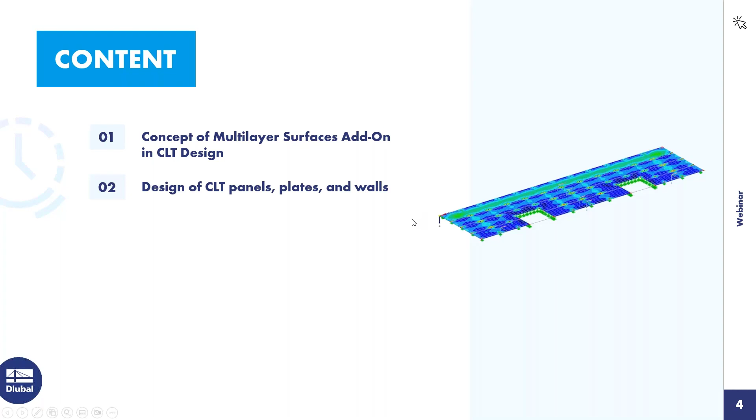The main topic is the design of CLT panels, plates, and walls. The third point is hints for modeling and results evaluation. Then I hand over the screen to Bastian and he can start.

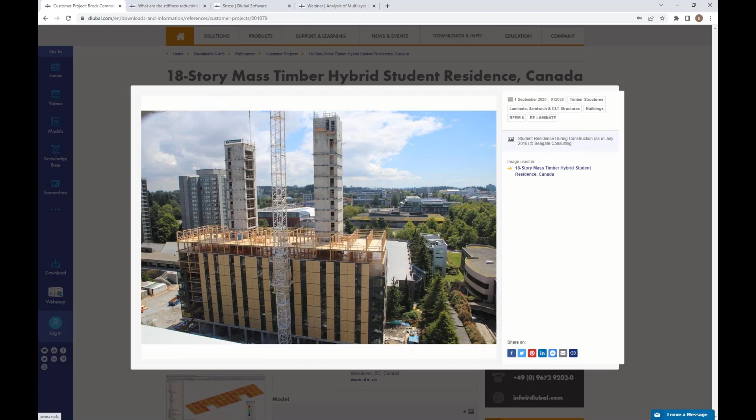Thank you. What I want to show you today is actually separated into two smaller models. The first one is based on a customer project, which we will just model from scratch and design. It's the Brock Commons building, so that's 18 stories and 53 meters high, standing in Vancouver, Canada. It's just because it's a perfect structure, and we will actually design one story of it.

Therefore, we directly go into our new program, RFEM 6, and will create a new position. I don't want to lose too many words about how you arrange models, and we are not doing a theoretical introduction into the design process, but a few words can be said about how the general model is going to be defined and how you can assign it.

First of all, we give it a name, that's Webinar CLT 2D Plate, for example. In the second register, we are actually activating the add-ons for what we want to design. So what do we need to do today? Of course, we want to define a CLT floor.

For this, for generating the stiffness, you would need the add-on multi-layer surfaces. It's written in the brackets there, e.g. laminate and CLT. So it's not only for timber, for CLT, it can also be used, for example, for glass and several other products like carbon fibers and so on. Wherever you have several layers of any kind of material lying one over the other and generate a stiffness from it, this is the add-on that you would need in our portfolio.

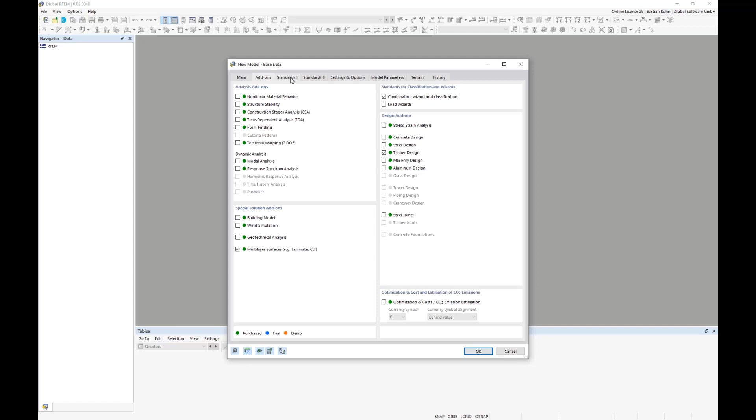As we want to design for timber, so for CLT, and we are in Germany here, I'm using the Eurocode with the timber annex. In case I would be designing in America, Canada, Switzerland, or elsewhere, I would have chosen the other standard. I can keep the global national annex, but of course there are for each country in Europe several national annexes you can choose.

In general, what you are doing with these annexes is assigning deformation coefficients, the KDEF. In this case, I'm designing in moisture class 1 and therefore use KDEF 0.6, which is already predefined. But in case I want to use another value, I can choose that there.

Timber design, it's the same as what counts for the load generation, and therefore we can skip that now from the explanation.

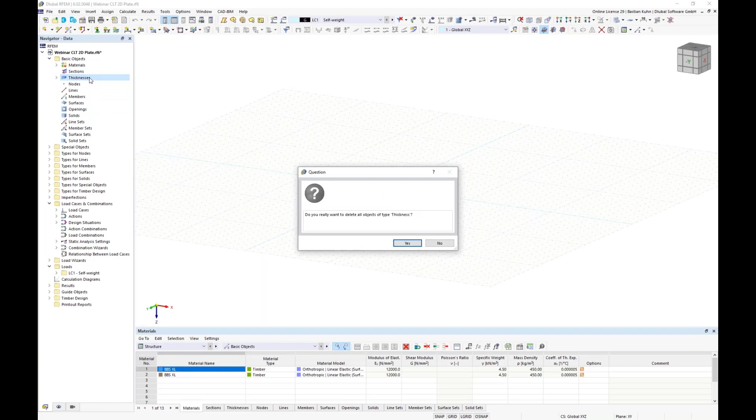Okay, then we are in the screen of RFEM 6 and will directly define the new thickness. Sorry, I wanted to start with a blank sheet, so I wanted to delete thickness and material because I want to show you directly what you have to do.

So if you go in here and want to define a surface, you first create a new thickness type here. Because I have activated the add-on multi-layer surface, you have a thickness type 'layers', which we will be using today.

So when you choose that, you see that thickness and so on can no longer be introduced here, but a second register is opened where you can define layers.

There you can also directly go to the material database and choose an orthotropic material model. If you go to the library, you can see that we already have a few producers there: Binderholz, Haslacher, KLH, Züblin with the Legno itself, Stora Enso, and so on.

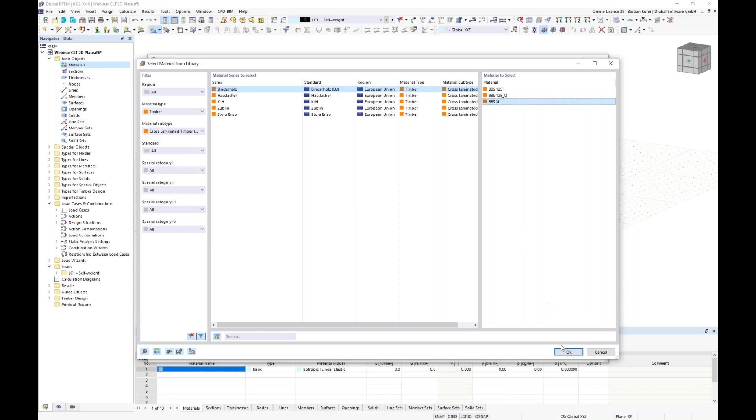I will choose Binderholz with the BBS XL because I want to show you exactly what this is doing. Now that I've chosen this material, it took directly from the database the correct strengths which the producer, Binderholz in this example, gave us - especially the verification or strengths for the shear stress verifications, which is something where you do not have any values from standard.

So if I had chosen an ordinary C24 material, I would not even have this strength here and would have to assign them. Okay, so now this is predefined and ongoing.

It also made a stiffness of 12,000 Newton per square millimeter in the X direction, and in the Y direction it is 0. I said already, we don't want to give you today a theoretical introduction into our design.

Therefore, during the modeling process, I will show you our homepage where you can take a look into the manual, and we offer also special trainings for that, which I will also want to show you.

But now, just what I say: in X direction, it's 12,000 Newton per square millimeter, and in Y direction, for one layer, we have a value of 0.

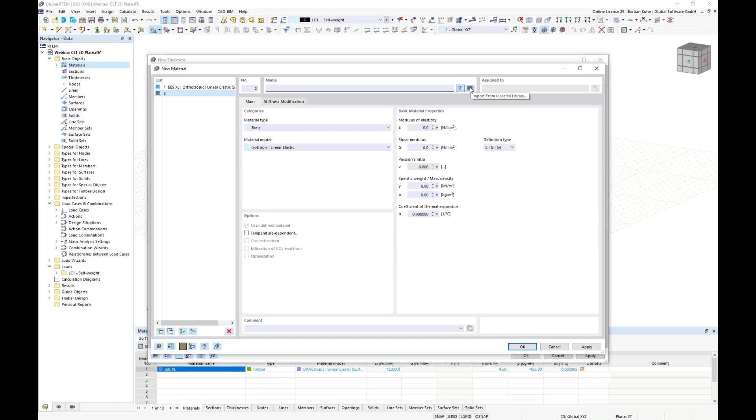For graphical reasons, I'm now choosing the same material once again. So go directly back to the database, choose this material here as well, and give it a red color, because I like the difference between red and blue.

So that's here. I'm using exactly the same material model. There's no difference in between this. So also the material values, they are the same. It's, as I said, just for graphical reasons.

Yes, you see now that it's red, and in the rendered material afterwards, it will also be red and blue. Just a personal point.

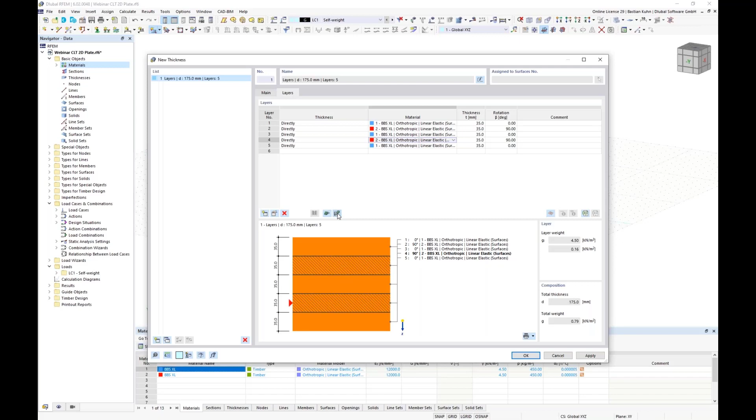You can also save this setup to a database. So of course, we could use it for the second model that we want to create today. Therefore, we name it now Webinar CLT, or whatever name you want. And then later on, we can load it from a template in here.

Ongoing, what I missed now is the stiffness reduction, because when we are calculating with the shear stiffness transfer of the load, we have to reduce the shear stiffness in some parts. So the torsional stiffness D33 and also the in-plane shear stiffness D88.

I will also show you a link later on where this is described in more detail. Here at the bottom of the third register that has now opened, I have options especially for CLT design. I could use glue at narrow sides. The reason for this is that most producers glue their CLT on the narrow sides, at least for the production process. They do not assign it for stiffness, because this is in the values I just showed you—the EY is still 0 there—but they are using a little bit higher shear strength. But stiffness, because of cracks in the boards, they are not increasing it or regarding it. So in the first model I will glue it at the narrow sides, and in the second model I will show you the difference, what happens when you switch it on or off. For now, we're using it glued.

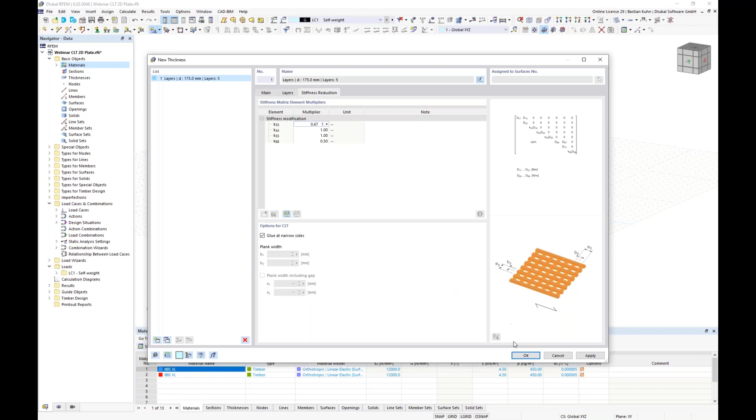Okay, say okay, one more time okay, and now we are in the screen. Use the origin of 0,0, and then take a width of 55 meters, and the height of each plate should be 3.5 meters.

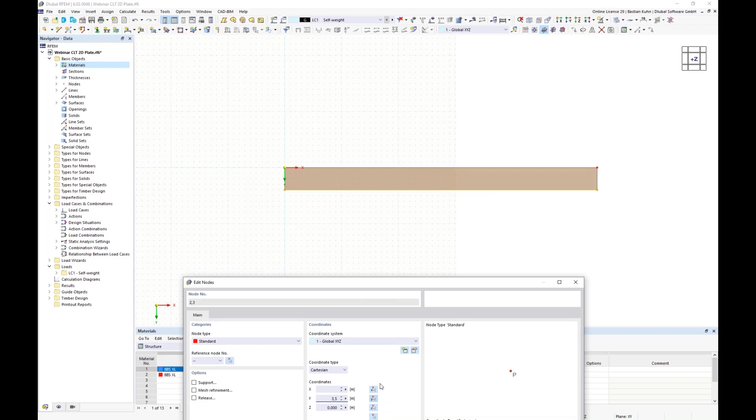Of course, I know it's not possible to produce a 55 meter long board, but there are options to calculate such things also stiff for the rotation. I want to have several boards with a width of 3.5 meters in the Y direction, and that's where the higher force can or should be regarded.

I'm using the dynamical size of the grid and will now copy the system 3 times into the Y direction with a value of 3.5 meters.

So then it's here, and I want to show you now why I used the rendering. Therefore we switch here to the view screen and say surface. So see it—no, now you cannot see it. Sorry, I have to go to model, solid model, surface, filled including thickness.

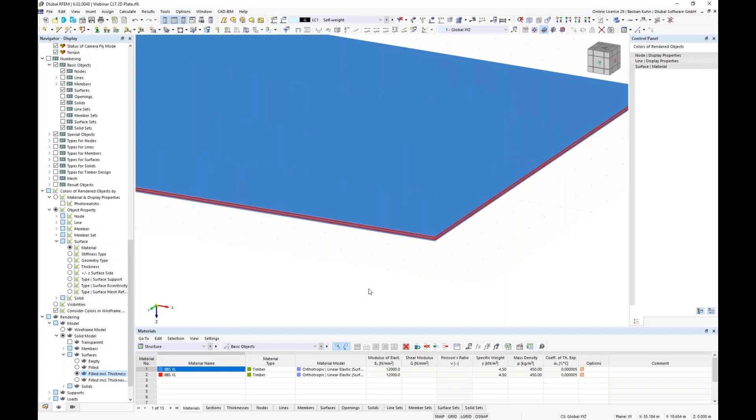Now you see that's the only reason why I did that, because you can now see each layer in here, and it also becomes much better visible how the layers are oriented.

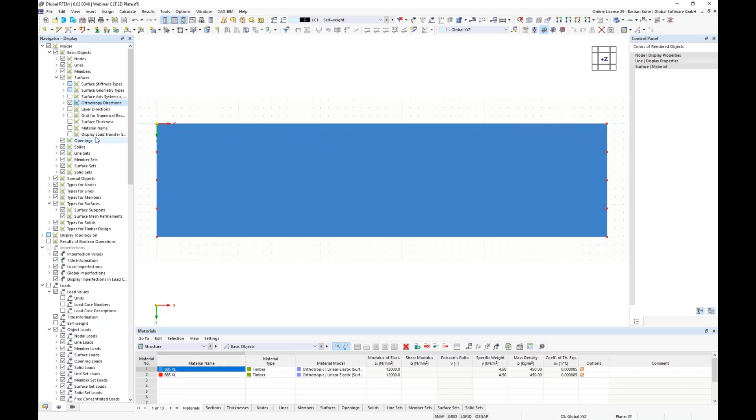We have implemented here in the surfaces a so-called orthotropy direction, because the material model I showed you and explained is an orthotropic material. But if you switch that on, you see nothing happens. Why is it like this? Because now the layers are oriented in 0 and 90 degrees.

If you want to see how they are oriented, you first have to switch off the rendering, and then you can see how they are oriented. If you switch the indices on, you see that layers 1, 3, and 5 are oriented into the X direction, and layers 2 and 4 are oriented in the Y direction. So my main stiffness is in the global X direction. That is what is important here.

Okay, so that's the model. I can right now switch that off and divide these 2 lines by 3 nodes, because these are going to be my stiffening cores in the center. They are made from concrete, and I'm just attaching to this.

That's how it was assembled in the building in 2017. They have a width of 6 meters, and the second core is at an origin of, let me take a look, 37 meters. I'm not using the exact values from the building, but just to have it close to the structure that we have.

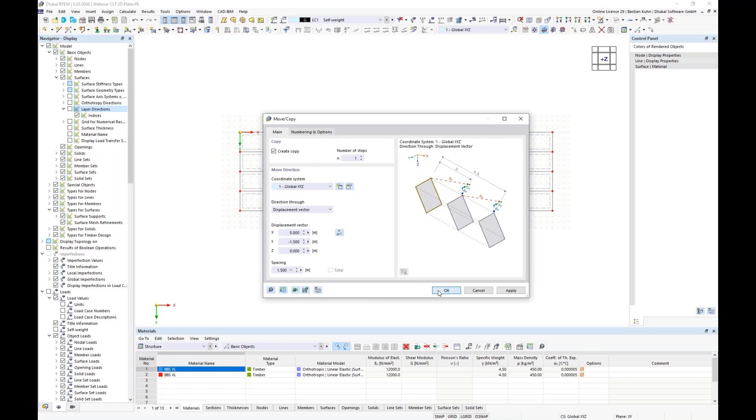So these 3 nodes I will also just copy once, minus 1.5 meters. Say okay, and then I have it there, and I will draw a few lines in here and there. This one I will copy via drag and drop onto the right side. I will connect the lines in here, and then it's okay.

A very nice function—not a feature, a function—is if you right click in here, you can divide the surfaces by integrating lines. And now you can just delete the surfaces which we do not need.

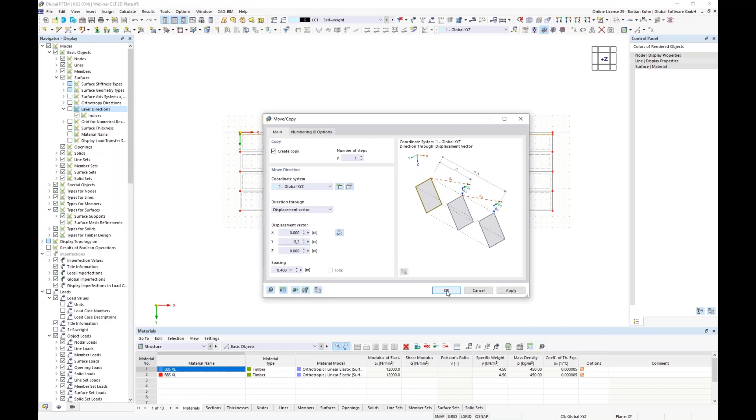The facade is running on the outside of the structure, and the supports are laying on the inside. Therefore we are copying the outer line now about a value of 0.4 meters in the Y direction, and this one also on 13.2 meters as well, also with one copy.

I will take the inner lines, and before I do that, I have to look for the orientation of these lines, which also works via the display navigator lines, line orientation. Now you see that this line is not in the same orientation, so I will use reverse line orientation here.

Now that I'm in this dialog, I can also check if my line axis system is similar. Since I changed it, this is important later on in order to define the slip between surface number 1, 2, and so on. I will explain that when I get to it.

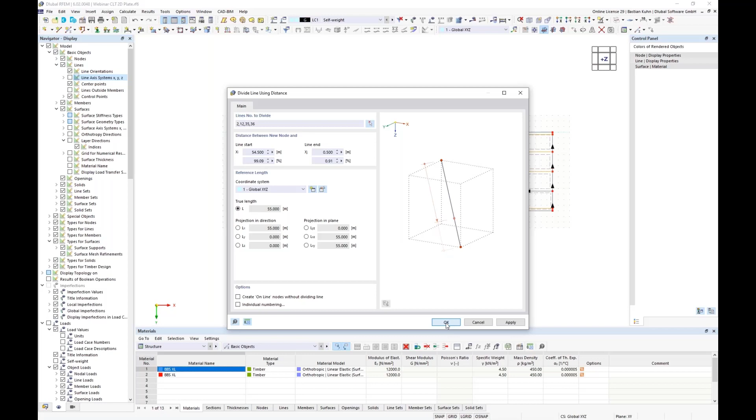But first, for the supports, we want to divide the lines here. Divide line, distance from the end is 50 centimeters. Still forgot one, sorry for that. Divide line with a distance at the end of 0.5. Okay, it's not happening again because I have to do it here as well. Divide distance, and then at the start also 50 centimeters.

Okay, now this is how the supports will be running, and of course that's not enough supports. We need more columns in the structure.

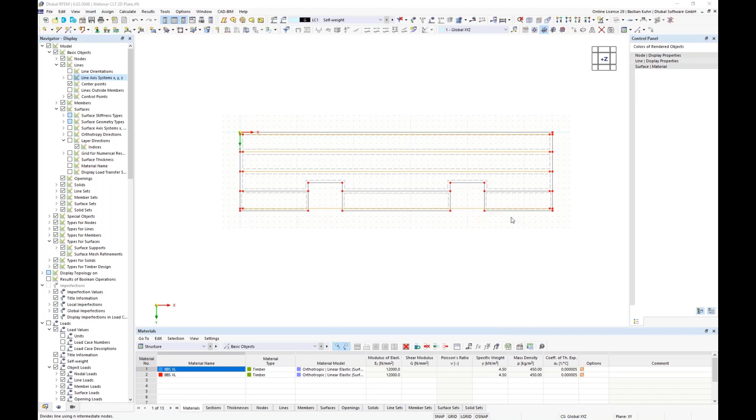We also have to divide the line by intermediate nodes, and a very nice function in RFEM 6, which has been improved compared to RFEM 5, is that you can now create a line without dividing it. You could do that in RFEM 5 as well, that's not completely true what I'm saying, but there are more options for it right now.

So I'm copying it 11 times, I think. Yep, 11 times without dividing it. That's all, sorry. Okay.

Now the structure is nearly there. I have to just interconnect that. Actually, that's not really necessary, I could also have left it like this.

And for the inner line here, of course, you also want to have the nodes copied there. The shift function deselects what you do not want to copy. Now I'm doing one copy with a value of minus 3.1 meters, and now they are there.

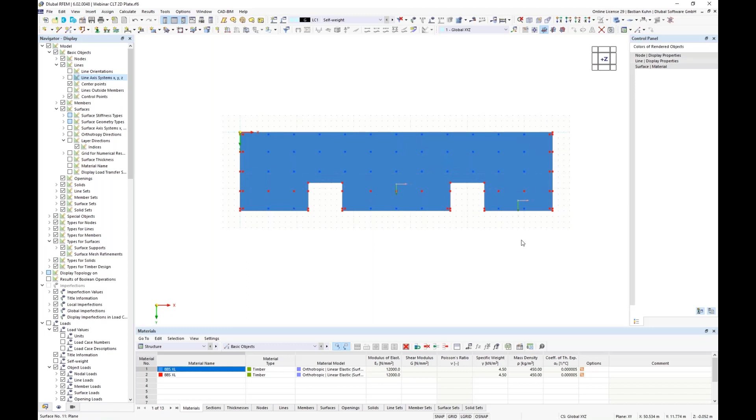Okay, I introduced it already several times, and the question is, how can I now define a slip in between this structure here? That would be done with a line hinge.

A line hinge is also very much improved in RFEM 6. If you remember RFEM 5, you had to do a lot of line hinges on such a structure, and now it's possible to do it for only one object. But still, you would have to define a slip here in the UX and UY direction.

And therefore, for the first time in this presentation, I want to jump out a little bit and show you a very simple calculation, Excel based. I just want you to know how I get this value and not grab it from heaven or somewhere.

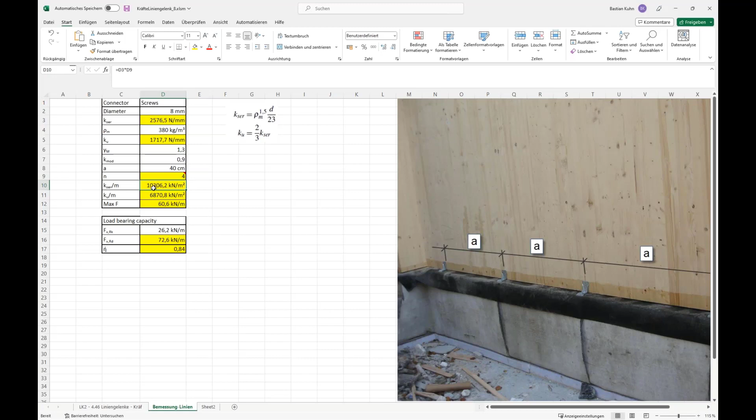Sorry for this little excursion, but I wanted, as I said, not to just present it as if it were heaven sent.

And if you have this value for the slip modulus, you can go inside our global parameters and name it, in this case, K. In the unit groups, you already have a lot of values that you could use, and we want line spring constant, which gives you this value here. Okay, insert, and now it's there.

That is not really a big step, because if you only have this, what does it bring you? Because now you design the structure and find out, okay, 3 connectors isn't enough, I need 4, I need it more stiff. Then you always have to jump back in here and define it, and also for your documentation, the printout report, you have like nothing.

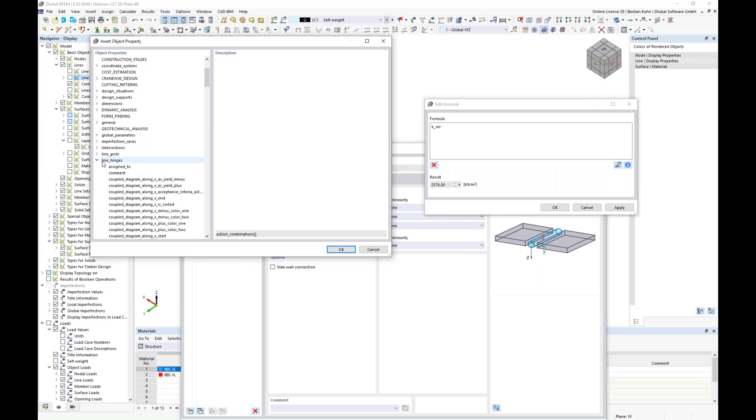So how can you improve that? If you go to this info box in here, you see there's the option to insert object properties. There are now also very, very many options that you can do, but we just want the simplest one of it, line hinges and comment. Say okay, and you see right now it's a simple JavaScript function that I'm using in here.

But it has an intelligence behind, because it already tells me what you're doing here is an error, something wrong. What is wrong? I need to tell the software what object I want to assign the comment to. So in this case, that's object 1, I just have to type it here. You see it in the list on the left side. And I forgot the addition in here. So now you see, well, the value is still 0, but I have something in here.

In order for my documentation, I'm using this little slash in here. That's just, yeah, something you need to Google and will find out directly.

So if you say, okay, nothing changed, that's a little bit annoying. Why is it not sending that value that I want? Because you have to define it here in the comment. And if you see, say 3 connectors, or whatever, you can also say 3 screws or whatever it is.

First of all, this comment is taken to the printout report, I will show you after we did the design. And now if you find out during the process, okay, 3 is not enough, I need to do 4, or it has just to be stiffer, you can just define it here, and it's changed in real time.

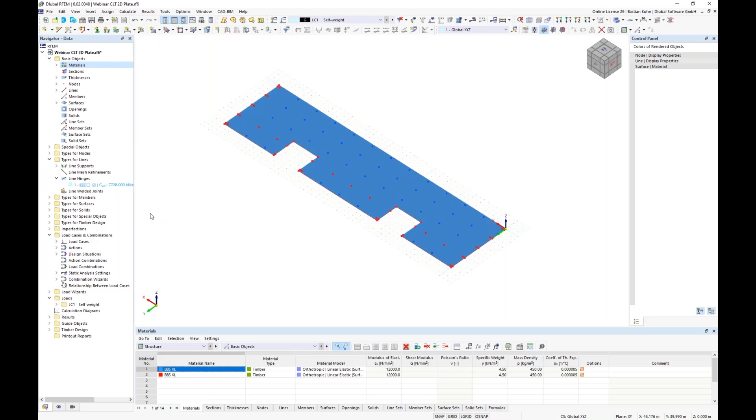If you jump into types for lines, line hinge, it gives you the opportunity to show you the advantage of it, because in RFEM 5, you would now have to open the dialog once again and also define the line hinge once again. But as this is an object now here, I do not have to do that.

And can now do it correctly and choose the surface and assign it to this line, this line, this line. So wherever I'm assigning it, I'm defining a slip. So in between this plate and this plate is defined a slip, and this plate and this plate. And now is missing a slip between this plate and this plate.

And yeah, once again, back in RFEM 5, you would have to define the whole stuff once again. But in here, I just can click there, and it's absolutely no deal. So that's, to me, a big, big advantage of the new workflow.

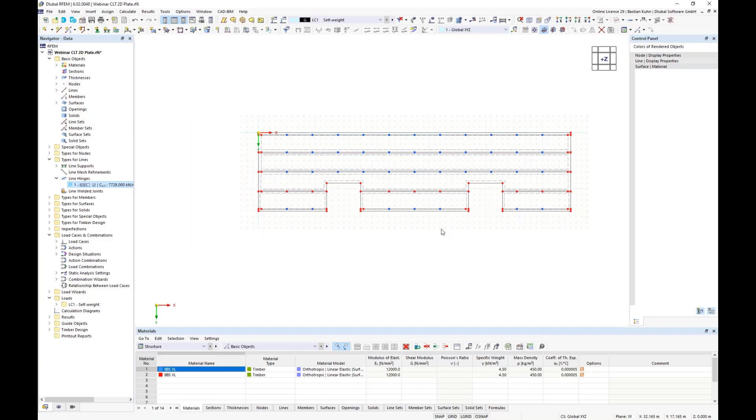Okay, it's a little bit small. Maybe I will just increase the size a little bit just to see it in here, and go actually in Z direction again. That's now defined, and I can define the supports that are presenting the columns underneath. They are very simple, they are just using force in UZ direction and nothing else. Say okay, and assign it.

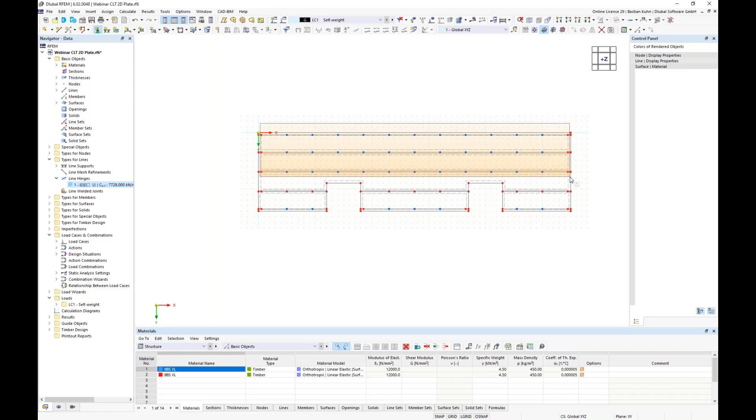In here and in there and there and there. That's also, to me at least, a little bit small, and we can also maybe just a little bit increase it. Okay, what else do we need?

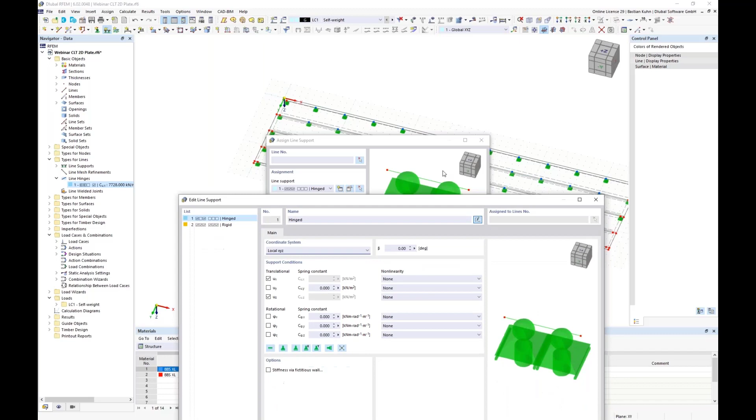In this case, when there's a horizontal force, it will just move away, and we need to define the line supports from the core, and that would work via line supports, define or edit the existing ones. We use actually the same intelligence here, but for local systems, and because we want the force just to be acted in longitudinal direction of the line, I will just release UX, or just give the slip to UX UI.

I will complete the release. That's how I want to do it. And then I'm using the same as before, using Kaiser. Do not make the mistake from before.

Now if you go in here, it's not line hinge what we want to do now, but line supports. They're also just the simplest function comment. You see here, you can do a whole bunch of stuff with this, like diagrams with forces coming from other directions than UX and so on. That's all included in here.

But yeah, once again, we use the simplest one. So with line support, one point, same function like before, 0.1 and this, no error, and then we just type it here. What did we write? I forgot it, three screws I think. Now we have it here. Yeah, works the same way, trust me, it is like this. All right, three, this, okay.

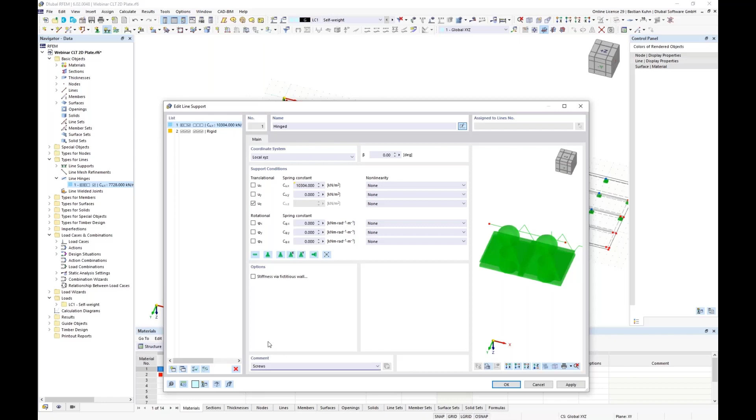But we need to assign it to the lines, that I should not forget. So where do we want it? There, and there. Choop. And of course there, and there.

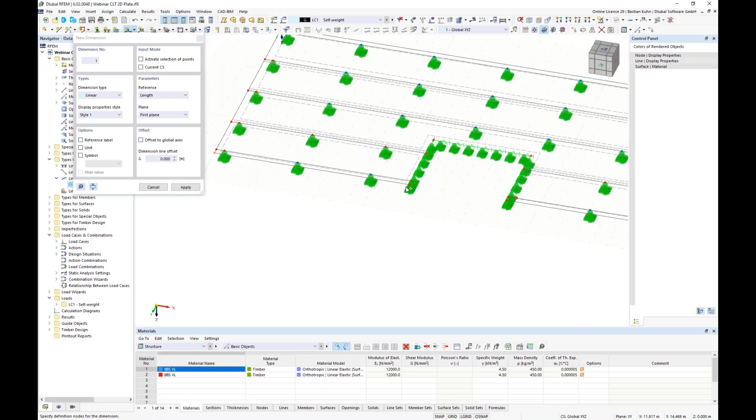So the model is now already there. Maybe we want to have some dimensions for it as well, just to make it a little bit nicer. And maybe we are actually directly starting the printout report, because there's something quite nice in the new RFEM 6 that I want to show you once we have the dimensioning ready. So okay, sorry, maybe you would do it differently when making the design, but for this I think it is now all right.

And we print this graphic to the printout report, because in RFEM 6 it is possible to have the printout report opened while working on the model. And we will do that. We will maybe use it window filling, or maybe we take maybe 40% of the height.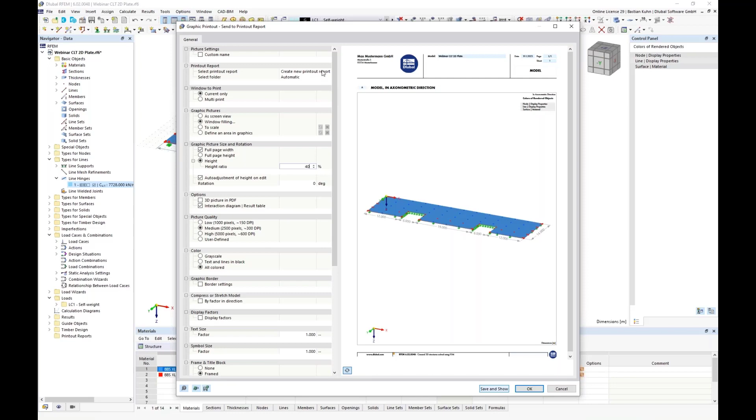Save and show. I did not choose a printout report. I don't know, actually I should have selected the printout report in here. Here. So, and it works the same way like the material database before. You have here templates you can choose from. And I actually have created one for today's webinar, especially where I selected and deselected a whole bunch of stuff.

I think we will now assign it and then go back to the design process. All right, it's generating it. Gives me time to drink coffee, a small one. Okay, now it's there.

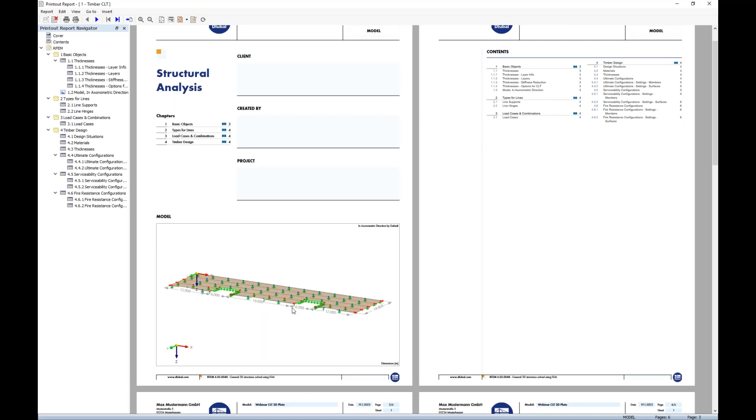Actually, I could have opened it, but we're not doing a webinar about the printout report today. Of course I want to show you what kind of points you can implement in there for CLT or for timber design in general. Okay, so here's now the model, and that's it so far.

And we go back to the design process and introduce the load. Deactivate all dimensions, because I don't want to see them any longer.

And introduce the load. So first of all, we're doing a horizontal force just to have a deformation in Y direction of 1 kilonewton per meter. If you have looked for the building, it is standing in one of the highest earthquake areas around the world, so there's probably more force than 1 kilonewton per meter, also from wind, there's probably more force. But yeah, maybe we are on the ground floor here and just have some small force.

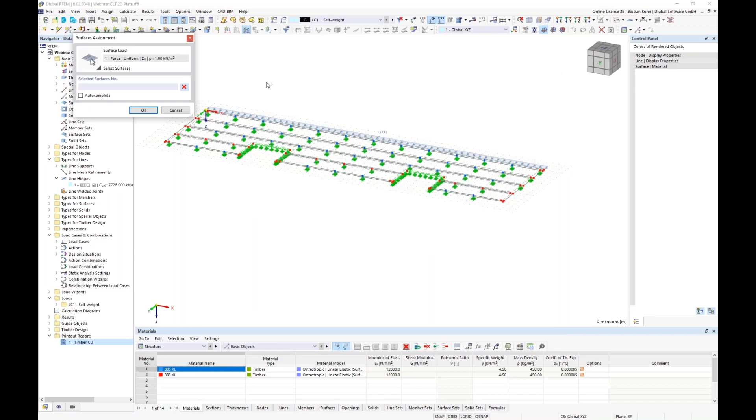We also take a small value in load case 1 from self-weight and say okay, we have that here. And now we define for each plate a live load. So this will be 5 times.

Say okay, and now also one of the advantages, if you compare it with RFEM 5 - and I worked long years with RFEM 5, so I'm still comparing it, but if you are new you do not have to compare it - in RFEM 5 you would have to define the surface on load case 2, say okay, leave the dialog, then choose the second, or in this case the third load case, assign it there, and so on. As you see here, this is also no longer necessary.

All right. And last but not least, this one.

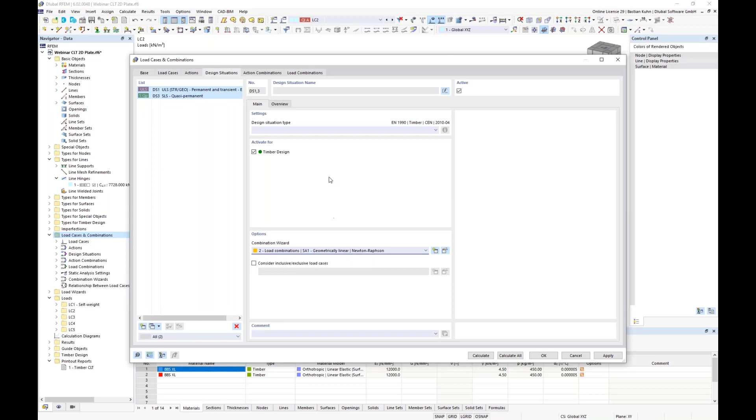Okay, so we can now also control if we did that all correctly. It's all correct. Let's go into the load cases and combinations. I'm choosing timber here as a standard group, and for the design situation, I would just use quasi-permanent. The others aren't of interest, and I'm calculating according to first order theory, automatically creating my combinations for that.

Now they are here, okay. I could have started with the design in the add-on timber design, since I've activated that in the basic data, but I have to show you the objects you should take care of first. If you compare that with RFEM 5, there you have the design add-ons Laminate and Timber Pro, and everything you defined in these add-ons is now moved in RFEM 6 into the objects.

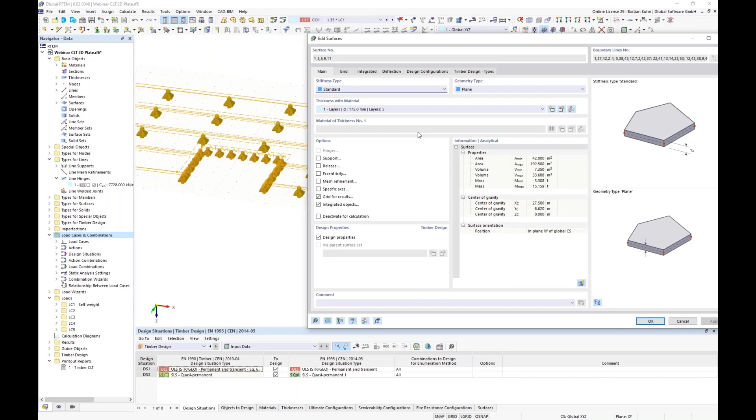In this case, we are designing surfaces, so you define it here in the surface. First of all, if you look for the deflection, you can choose deformed or undeformed system, but that's not what I'm up to. I want to show you that a plate is always a little bit problematic when it comes to a non-clear deformation, where you should also consider a reference length.

The distance between this support here on my node and this point is actually 4.5 meters, if you remember what I did by copying them. But how do you want to regard it with this other side? Therefore I choose 5 meters, because I'm taking the difference between this point here, which you can't see now, and the other point there. So, to me, that is now on the safe side.

And if deformation gives me problems, I would anyway have to do a more detailed deflection analysis. Okay, I hope that explains it a little bit.

Ultimate limit state configurations: we have a combination for ultimate limit state configuration, and therefore, of course, we also have to look at the objects. The first two registers are for members, and the third one is for surfaces.

Maybe most interesting for the designer is that now for CLT, it's also possible to consider a system strength factor. So that would be possible in here, and then you could increase it to 1.1, for example. The other options are not important for surfaces, so I'm not explaining them.

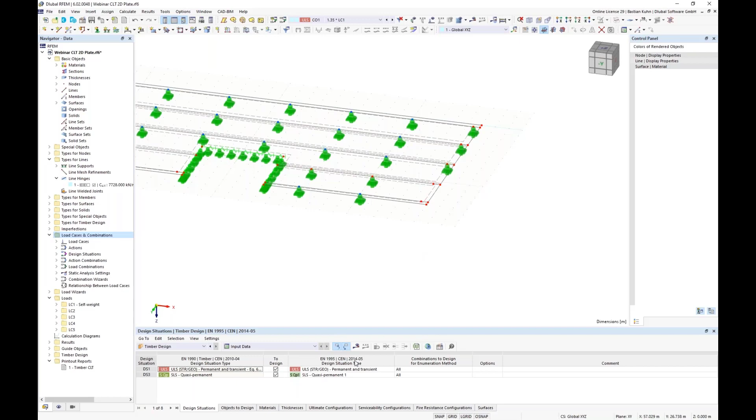Okay, so that's now done. Enough explanation. As a first step, I can also just calculate the ultimate limit state, because the serviceability state I could design once I'm sure everything else is working correctly.

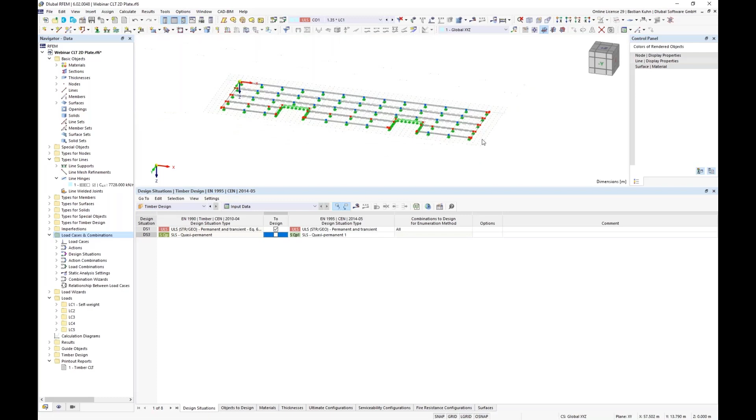Actually, let me see what I missed here - there's a support missing there, and also there. Maybe I should do some checking before we start, but the rest looks great.

I will start the design process and give you small explanations about how the stiffness is generated and what is actually done in there. That's what I wanted to show you right away.

Okay, that's opening now on the other screen. Ta-ta! Hold on. Oh, that's confusing me. I hope you see it now. Can you see it now?

Maybe my colleagues can give me... Andreas, can you see the presentation now? Yes, perfect, okay.

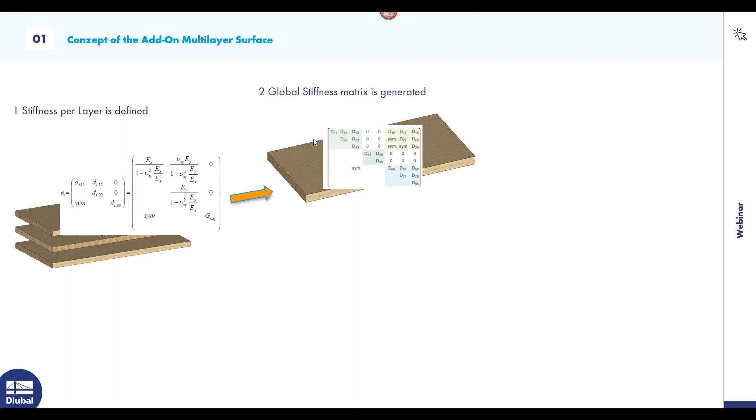Just a small theoretical explanation - if you remember how we introduced the layers: we defined a stiffness of EX and EY, a Poisson's ratio, and a shear modulus, and that is now defined in every layer. From each layer, we calculate a global stiffness matrix, which is exported into RFEM. In RFEM, we calculate deformations, stresses, and inner forces on one plate, not on the whole layers, but on one plate. These inner forces are then transferred into every layer. That's the theory behind it.

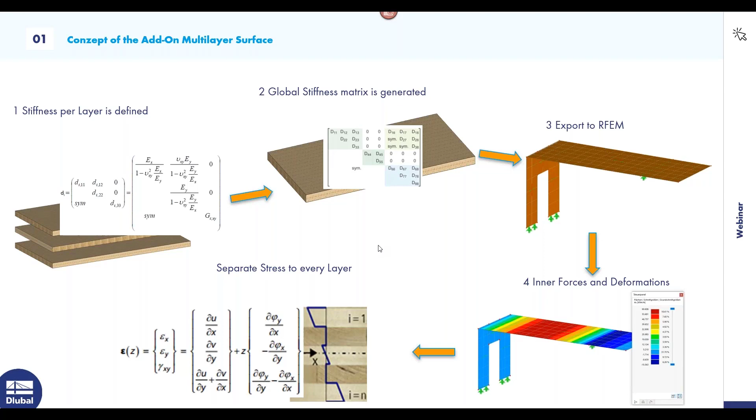So let's see if we can get RFEM6 back, or maybe the homepage. I don't know, right now my screen is a little black. We can take a look. Transfer. Okay, there you go. I did the webinar in German language on Tuesday, there are problems with my screen. I think that's based on the software. Sorry, go to webinar. I don't know, okay. We can take a look at the results in RFEM6. Hold on. How did we name it? I think it was this one.

Okay, so you see we have now an overloading, which is not the desired behavior because we want to be green and we want to be smaller than 1.

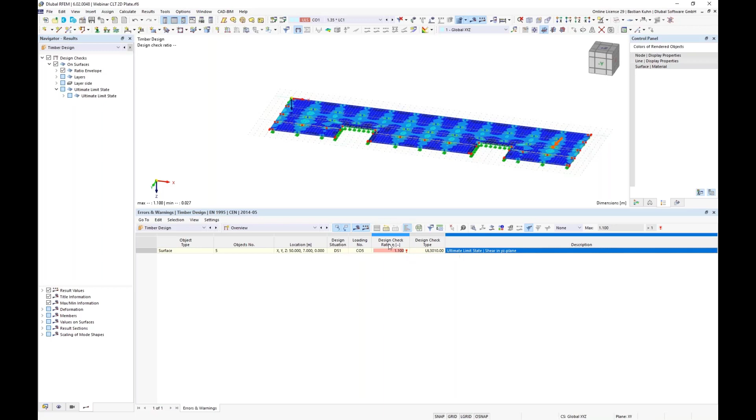But if you look into the details, you can see the overloading is just in a very small spot here. I can switch off the nodal supports, they're not necessary to me here anymore. If you realize that in reality there's not a needle standing underneath this point, but a column with a diameter of, let's say, 40 centimeters, it's obvious you should not take the force in this exact spot, but somewhere outside. I'll show you how to do that.

In the literature, you will find this described as a so-called punch-through verification. But before we do that, let's take a look at the verification itself.

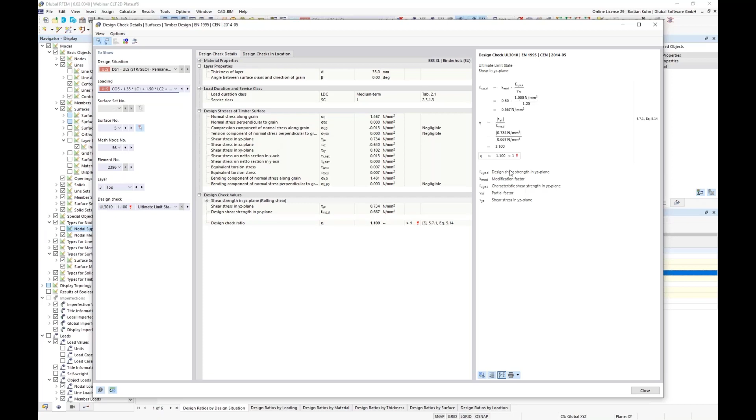Via double click, we go into the details. You see now that in RFEM6 we have quite nice equations shown here, filled with values - the shear strength is shown here. You have the option to look at the ratio over the section itself, and here are the several layers we've defined. You can switch to stress and look into it - sigma x, the bending stress - you see that where you have high stiffness and high loading, you have a higher stress.

And of course we also want to take a look at the shear stress, which is usually in the center of your section. That's the same for beams as it counts for plates as well.

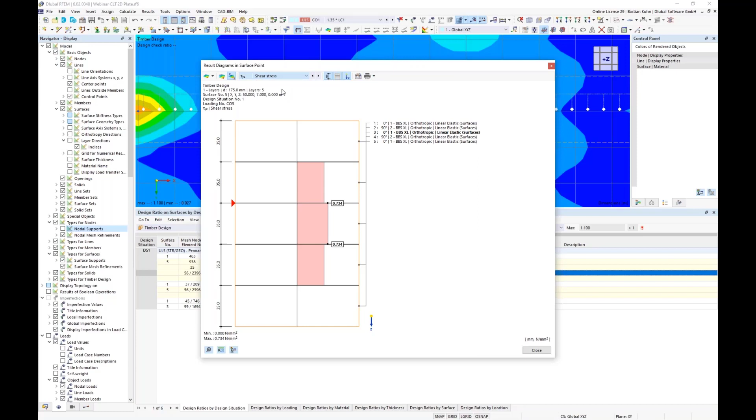You could also print such things - maybe not this one, but maybe this one - into the printout report. It's opened on the back, so we can just take it like this, maybe a smaller height. Actually that's okay, so we say okay, and then it's already in the printout report, and I don't have to look at that now - we'll do that later. Say close, or I could have left it open, it doesn't really matter.

What else is new and possible, and much nicer than it was in RFEM5? If you go to the result navigator here, you can see that first of all you now have a ratio envelope of all stresses in here. You have them here and can print them to the protocol directly, or use them for your analysis as well.

You can separate between several stresses and also between, well we just have one layer here, but several layer sides - for example top, middle, and bottom. Here I can choose the layer. So for shear you would probably use one of the inner ones, and for bending you would probably use the outer ones. That's the first nice function.

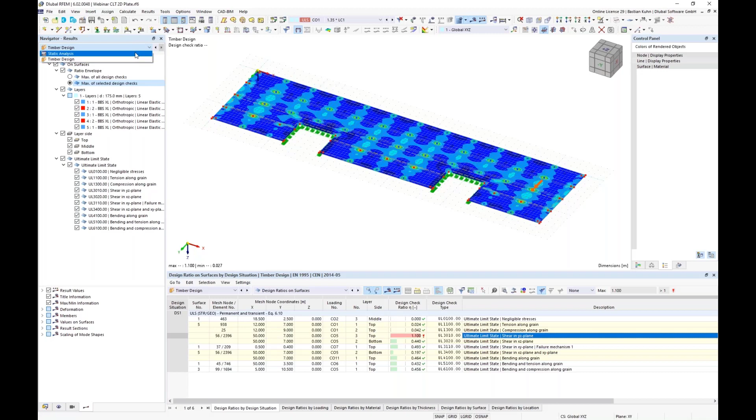If we jump back to the static analysis itself, for the connection design, when you go to the static analysis you can see the global deformation and compare it just to get a feeling of what's going on here. You could also look at your stresses and strains for each layer. That's quite interesting for some cases, I think.

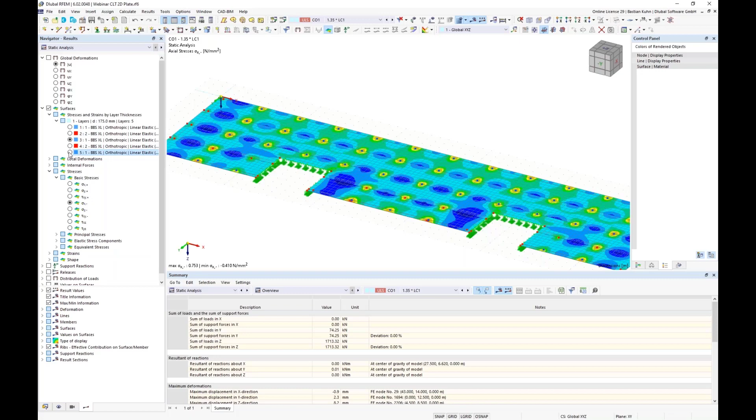If you compare sigma x on the negative side of the surface, you see a maximum value of 3.8 at the top. If you go to the middle, the value is quite low. And if you go to the bottom of the section and choose sigma x on the positive side, it gives you the same value as you had on the top side. So that's also something you could use for your analysis.

We want to look at static analysis for the connection design, so we have options here. The simpler verification of the connection is in the line support, because there we have just a slip defined in the x direction. So this is the force you need to connect with your connectors in the x direction, or the longitudinal direction of your line.

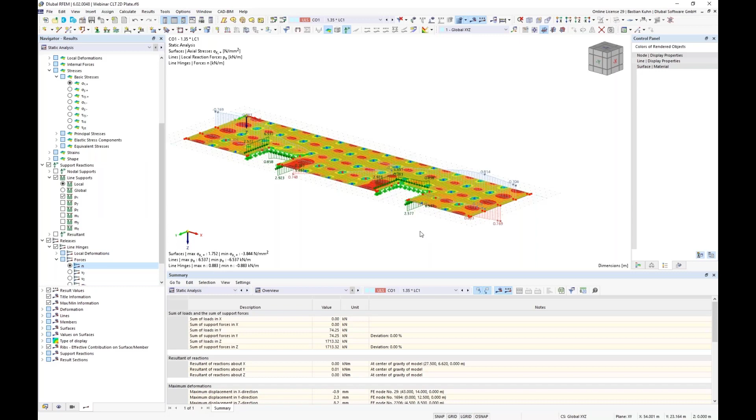For the line hinge, you can also take a look at the force here, which is the force you have to assign between this panel and this panel. Let's take a look where the maximum value is - well, it doesn't matter, it's here. It's quite a smooth value, and you don't have any singularity effect in the connection itself. But nevertheless, from time to time you will face this problem, so in the result diagram, maybe we'll switch to one of the bigger ratios here.

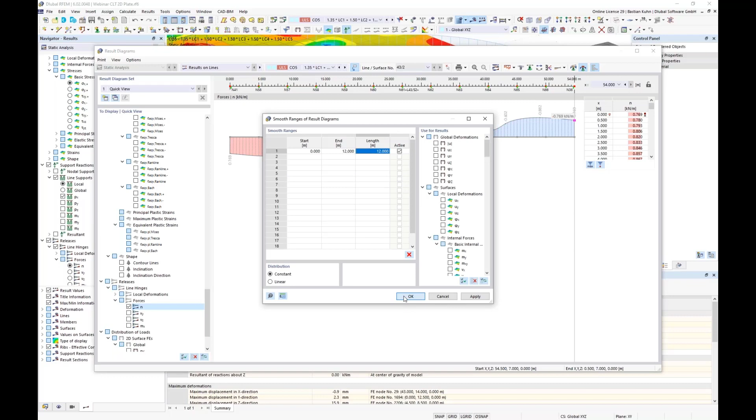In the result diagram, you have the option to smooth these values as well. So you can say force, normal force, and if you look at the values here, say okay, 10 meter, 12 meter - that's where I'm averaging, or where I'd be able to average my results. If you set start 0 and 12 meter like this, you see the force that has to be attached by connectors is 9.464 kilonewton, and per meter you need a force of 0.789.

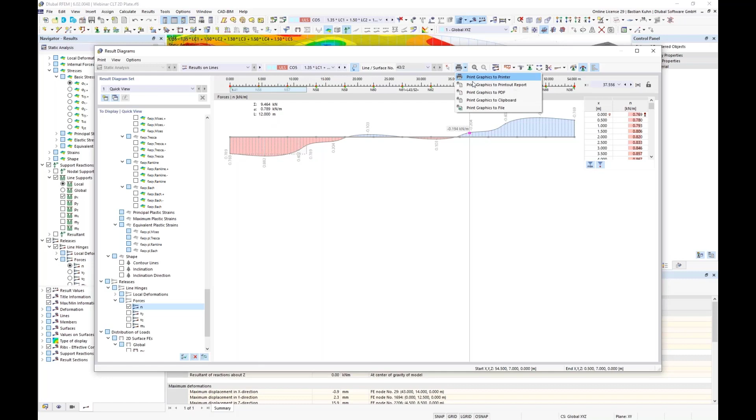So this is probably something we want to put into the printout report. We'll say maybe we won't use the full height, but something like this should be in there, and leave the dialog. This result diagram, I also wouldn't need to close - if you work with two screens, sadly in our presentation tool we don't have the option to show two screens at the same time, but this doesn't need to be closed either.

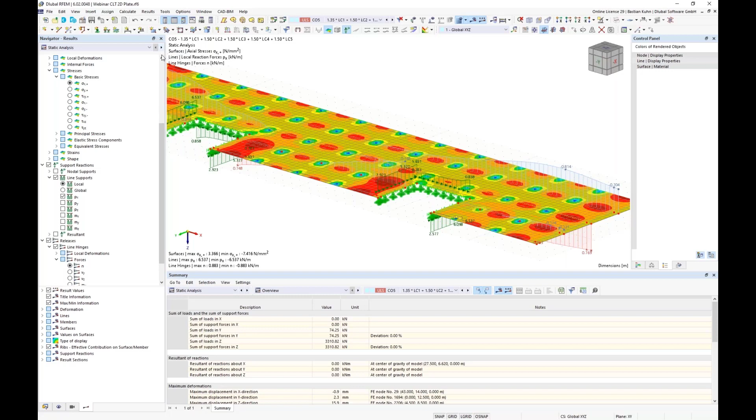Back to the design of the timber. When you look for that, we still have overloading here. How can you get rid of that? It's actually similar to what I showed you with the smoothing of the result diagrams - it's just called differently. It's called insert special object, surface results adjustment. This is just for smoothing your result.

So now if we say we have a column with a width or diameter of 40 centimeters, it's definitely possible to use a dimension of 60 centimeters. I'll show you the reason right away.

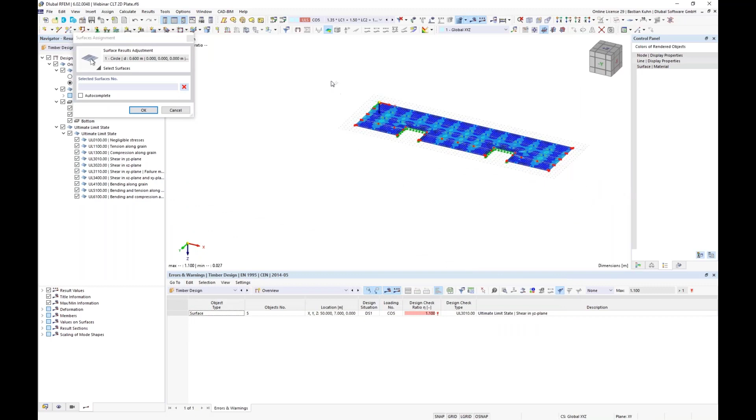I'm choosing all surfaces here, and I'll define it on the first support here - not the origin. You see I haven't shown the supports now because I've switched them off, but trust me, they are there. So this and this, I'm just using grab and... what's it called... grab and drag. Oh, I forgot it, sorry.

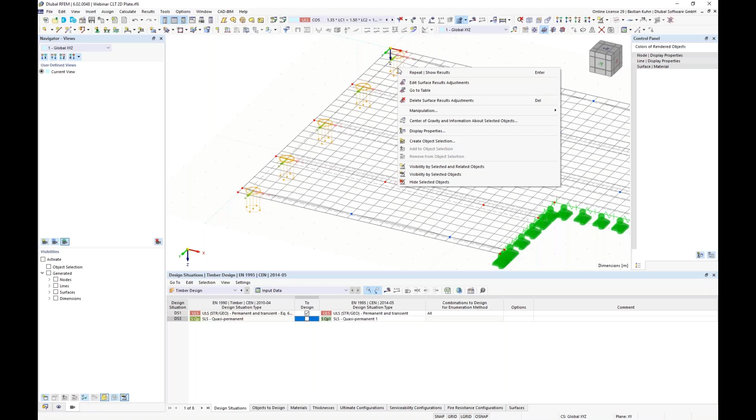So then I'll copy these areas here. Let me take a look how many times I need to do that. So, 12 times we need to copy it, because we have 12 supports in the X direction, with a value not in Y but in X direction of 4.5 meters - that's the span we have here.

So alright, go to that again. You see there's the axis system displayed for this - we don't need this, that's nonsense for our endeavors here. It also doesn't make it look that good, so we'll switch the axis system off.

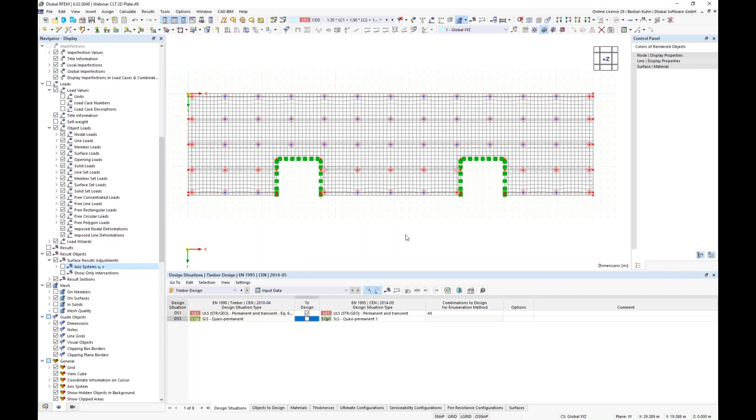And now we'll calculate it again. As I'm sure the design process is finished now, I'm also selecting the SLS design to be done, and go back to our homepage in order to give you the promised more theoretic explanations.

So one thing that I missed when I did show you the definition of the layer and the stiffness reduction was an explanation how the factors for K33 and K88 are calculated. My colleague Gerhard, who's now answering all your questions, has a very nice Excel file which gives you the option to calculate these values. Of course, when we have a database for the producers, we will also use the factors that the producers are offering us, so you do not have to calculate that for all the setups in there.

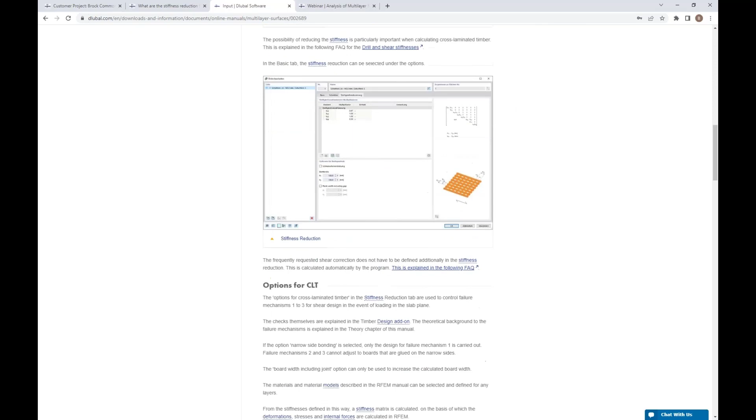The stress, actually, I wanted to show you later on, that's the online manual. It's not ready yet, I'm working on it, so there are still a few points missing. A lot of customers on Tuesday's webinar asked if it's possible to display the stiffness matrix for the global plate. Right now it's not possible, but you could download on our homepage or in the online manual a plugin tool, and if you use that, you can still see the stiffness in this example. So D11, that's the bending stiffness for this example that we have here in the manual.

I also said that we cannot give you a complete detailed theoretical introduction into the design of CLT. If you want that, we are offering online training. You will find it here also on our homepage, online training, and if you go to program version, training type Eurocode 5, that's actually the timber one. This is in March for English, the 16th of March.

If you like the building that I showed you here, this Brock Commons building, I did a webinar in September last year where I also showed the whole design process for the complete building, with all stories inside. That's it. So now let me take a look if there were questions asked very often.

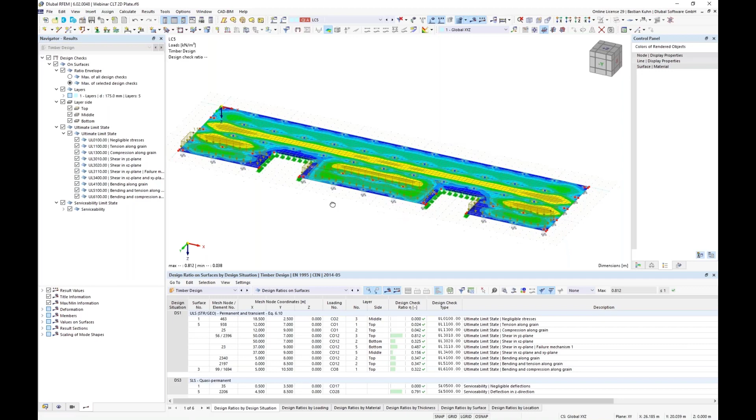In the theoretic world, you would have to define a live load in the first field from this point to this point to this point, and then this one should be empty, then this one should be loaded, and then this one should be empty, or this one should be loaded, and you need to do it in X direction and in Y direction. But for the sake of simplification of today's webinar, I just use this - I only know the German word - it's a Schachbrett loading introduction, you can Google that.

Therefore, I'm just using it in Y direction, not in X direction. Because if I would do that also in X direction, I'd have 10 or 20 load cases, and the calculation time will just increase.

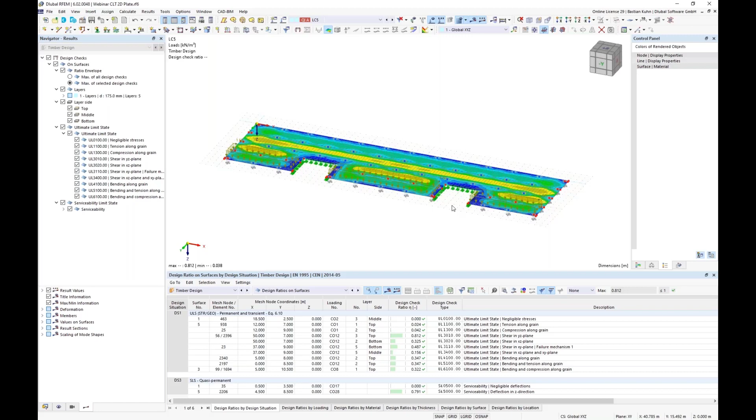You can compare it with a continuous beam. If you have 2 fields, you also have to introduce the live load on the left side and on the right side, because for the middle support, the highest force in the middle support will be with live load left side plus live load right side, but the highest field moment is with the force on the left side, if it is the longer span, for example. Okay, so hope that's clear.

And now we can take a look at the results and then just create a printout report and we are fine. Results good now, so the overloading of 1.1 is now changed into a loading of 0.8. Of course, you should make a finer mesh in here. So if you look in here, you see that the span is just smoothing it about this area. So in general, that's how it can be done, or how to regard the punching in here and how to avoid this overloading.

I've already shown you these verifications, so I won't spend too many words on that. Maybe we just go via double click into this verification of the serviceability and print out the report.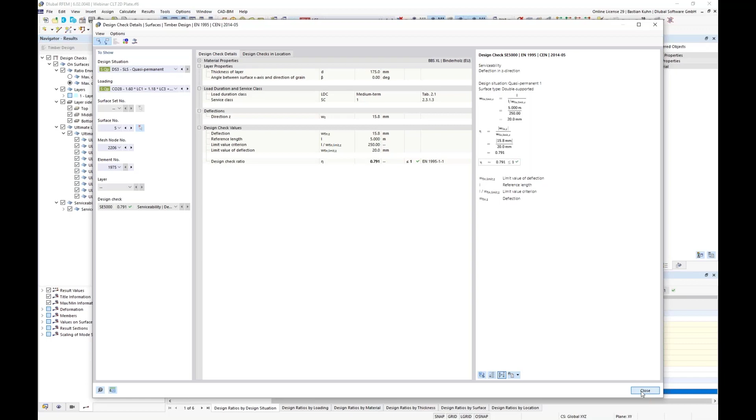You see, it's the same equations as in the formulas before. And now we go into the multi-editing of printing.

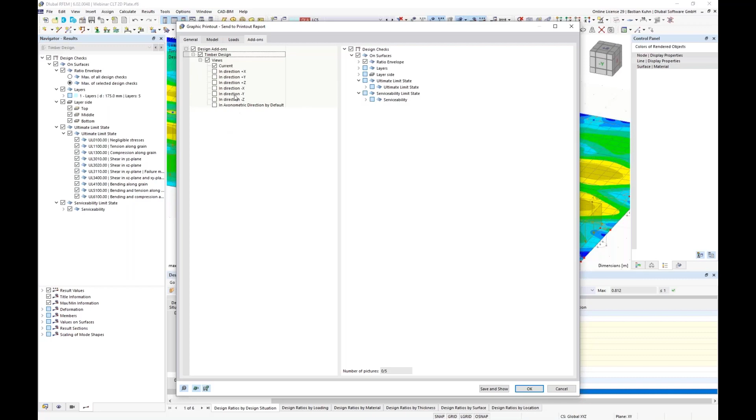Maybe, actually, I don't know - it's probably a lot of results. Okay, we can try to put it in there, and we want that window filling.

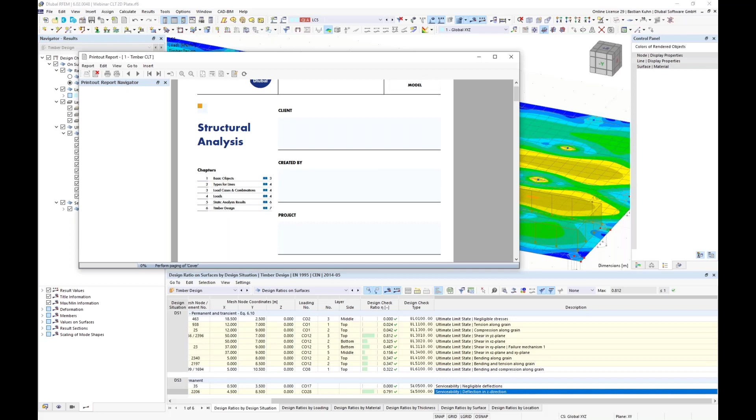And now we can open the protocol. I must find it, it's somewhere on the other screen. There it is, I think. Hold on. Yeah, there it is. Okay, now it's loading all the pictures into it.

You see it on the left side, but as I said, it has been open all the time. And now it's printing the pictures of the load, the results of the lines. What else did we put into it?

Details and stress verification. Well, we can take a look at what's in there. I'm not going into every detail, but into some details.

So first of all, the good point is that for documentation purposes, you now have the stiffness here, and you can write additional text into it, which was asked for quite often.

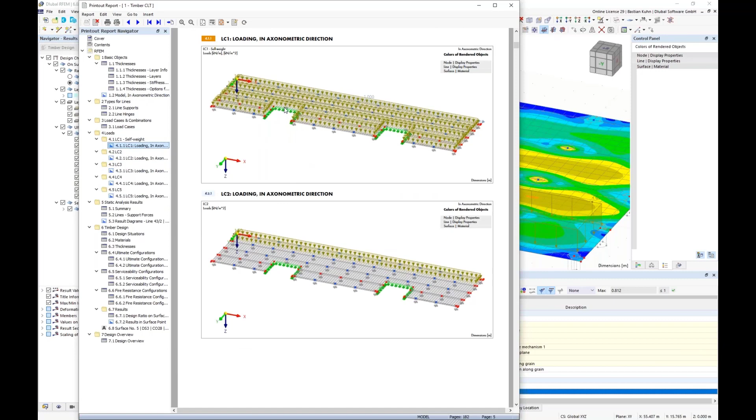Here's the model. Here you have the live load, the self weight. You have the live load of all these load cases. This result diagram we have here is also quite nice to have.

For your analysis, this diagram is printed in here, and also the deflection of it.

Okay, that's the bigger model, and now I'm showing you a very small model which should take less than 10 minutes. We name it wall and say add-on multi-layer timber design as well.

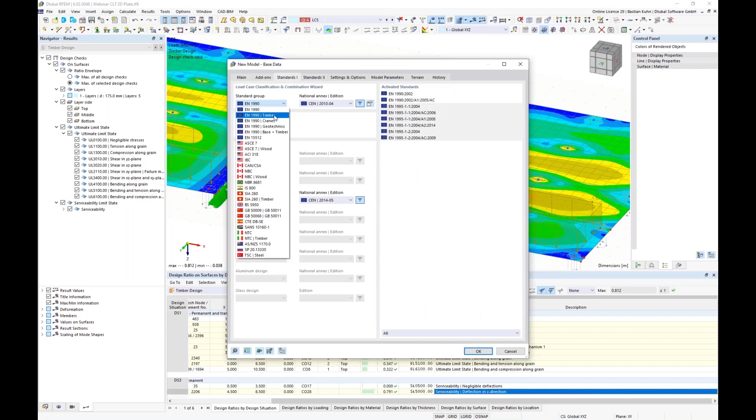It's the same as I did before, nothing new to say about that. We take a very simple structure now, go into this other area, and here again we can choose the material we have defined.

It's already predefined, but of course it's also the one I saved. It's the same material, and we just take it over.

Now, stiffness reduction - I want to show you the difference. If you remember before, I only reduced these factors here but kept it glued at the narrow sides. Now, if I change that, it will actually do two additional verifications.

Now for the last time I have to switch to the home page and show you the stresses I just announced. So if you have it glued at the narrow sides, it will only do the verification of - I don't know if the English word is really 'thrust gross section' - I have to look that up.

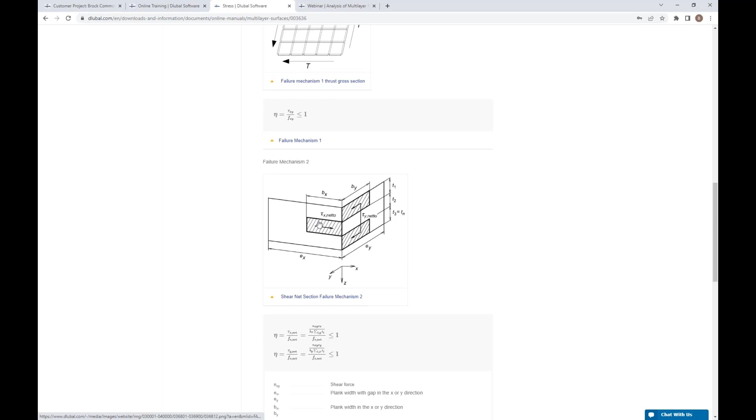But it will then not do the verification of the netto section, and also not of the torsion. So if you look into these two equations here, you see that the width has quite a big influence in all the equations. And now we get back to the program.

It would be possible to also include gaps, so that is also then regarded for the verification.

Also for this, when we have the producer material databases, we will assign the widths that the producers give us. In the standard for Austria, it's recommended to use 8 centimeters, but a lot of producers also calculate with 10 centimeters, which is also okay, I would say.

So the default value will be 10, and you as a designer have to say what you are using here. But I would say if you use 10, you don't do too much wrong.

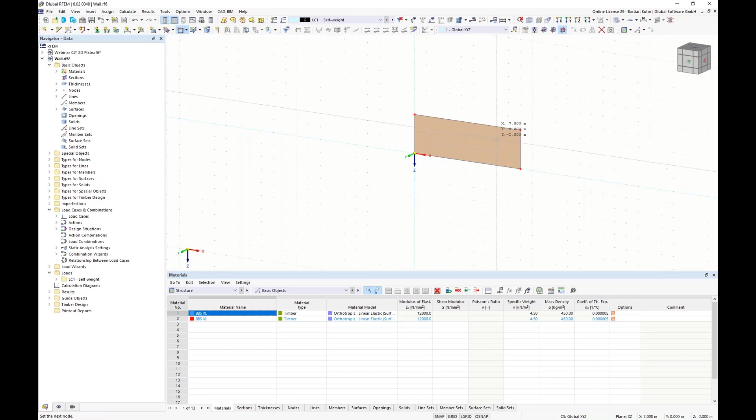So okay, we make it a wall, give it a little opening, assigned here just to have it symmetric. And in order to see something with the shear problematic, because that's the only reason I'm showing you this example, we make it quite narrow here on the top.

And because it is this kind of narrow, I have to refine my FE mesh in order to have at least 2 elements over the height of this little spandrel here.

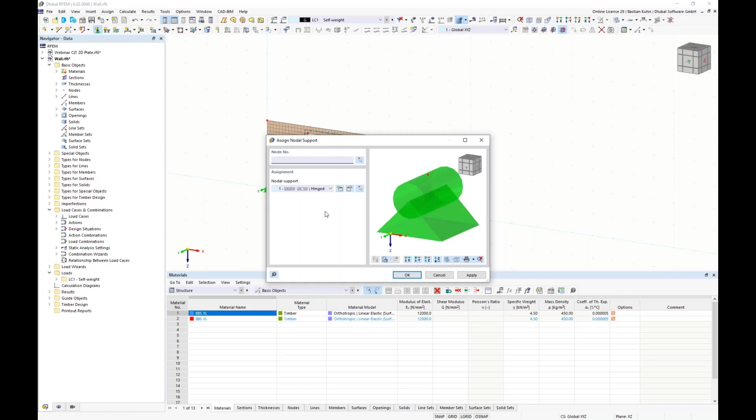We'll define the support on the left side. We'll just clamp it around for the torsion, so I don't have to define so much more. And on the right side, I have to define a new nodal support, movable in the X direction.

And also give it some force on the top, and the force will be 2 kilonewton per meter. And then I will also define a live load.

Maybe the live load has to be introduced on the bottom, because usually self-weight comes from the roof, but live load comes from the story. That should definitely be higher than 2 kilonewtons, so let's say 10 kilonewton per meter.

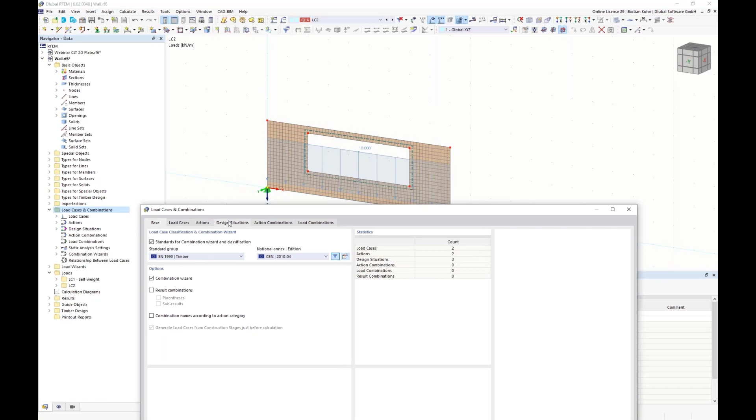All right, let's do a little combination. Of course, I know you need to do a deflection analysis for this very narrow spandrel on top, but right now I just concentrate on ULS, ultimate limit states. I'm not interested in this deflection now.

Of course, you could do that and say, okay, now I will calculate. Here are the design configurations. We're not concentrating on this, but just so you saw it, that they are still there. And now we calculate the results of the timber.

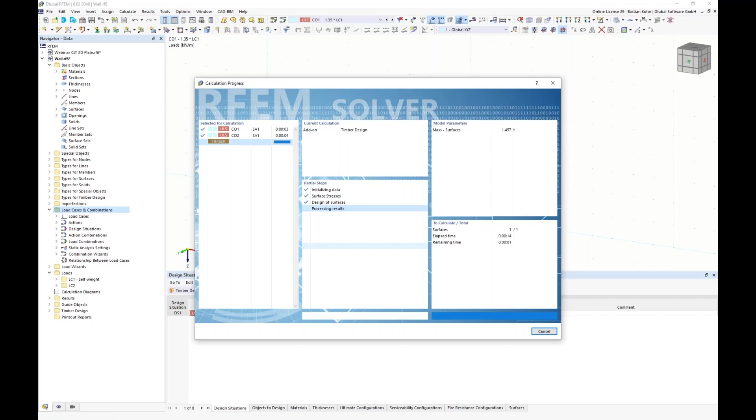And now these two additional verifications are done. I can show you the stress calculated for this. You see quite a lot of overloading. Why is that the case?

Because I forgot to do the smoothing here on the bottom. That's my fault, sorry for that. I forgot it, and therefore you go to insert.

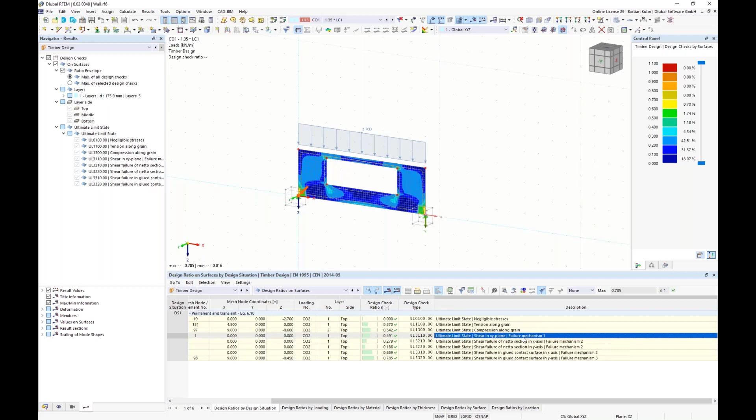What I wanted to show you is this verification we already had before, but now additionally we are doing the verification of failure mechanism 2 and 3. I think 3 is the more interesting verification. I don't know.

That's really just my personal feeling. So you see in the details that you have the torsional shear stress of this value, and we are also doing additionally shear stress in X and Y direction. But you see that the influence of this is very, very low.

So the basic point of it definitely is the stress of the torsion. Okay, tau X, that's here. Of course, it's constant over the whole section.

That's always the case for this kind of stress. And here you have it in the netto section, which is the failure mode 2. Okay, good, to me it worked all nice, or quite well.